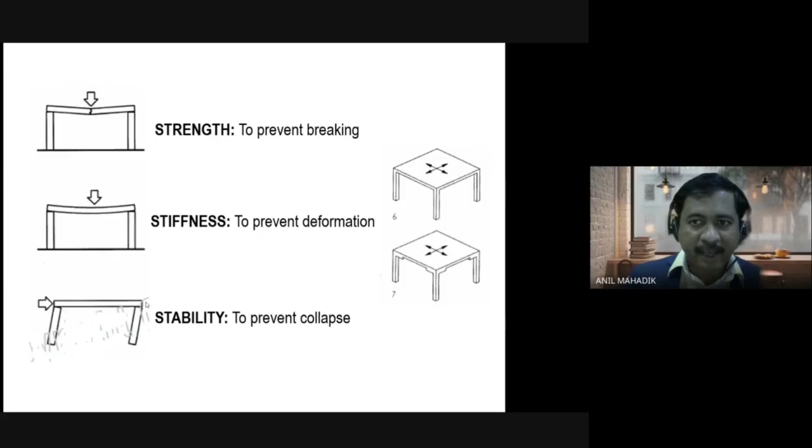To understand that, you should know strength, stiffness, and stability of the structures, and the IS codes used for this. You will learn that in our course. Everything you learn in the course.

Second part is analysis. You can do the analysis in softwares like ETABS or STAAD Pro, where we apply the loads on the structure model - gravity load, earthquake loads. Then we can get the forces from the analysis: bending moment, shear forces, earthquake forces, mode shapes, and so many things. These are required for design of the structures.

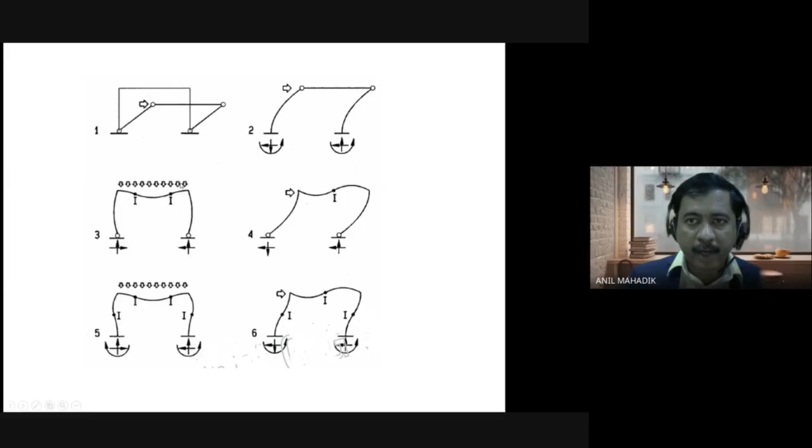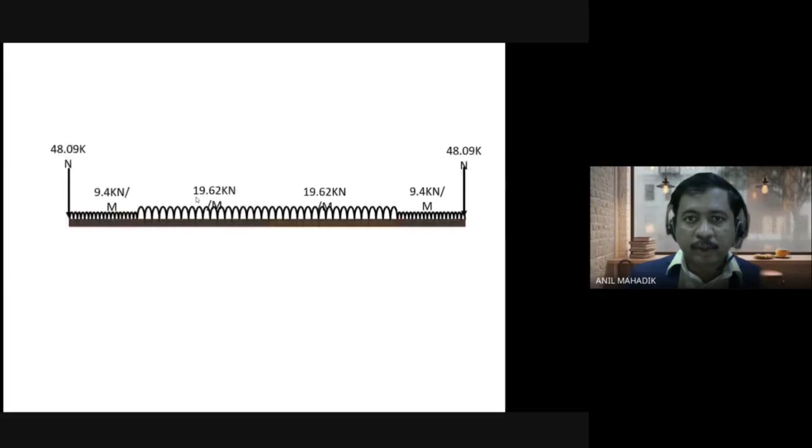To understand the analysis, you should know the deflected shape of the structure for vertical load and lateral loads, bending shapes, tension side, compression side, fixed support, pin support, and their behavior. You will learn that in the course for frames and multi-story buildings, so you can understand the bending moment and shear forces required for design of the members.

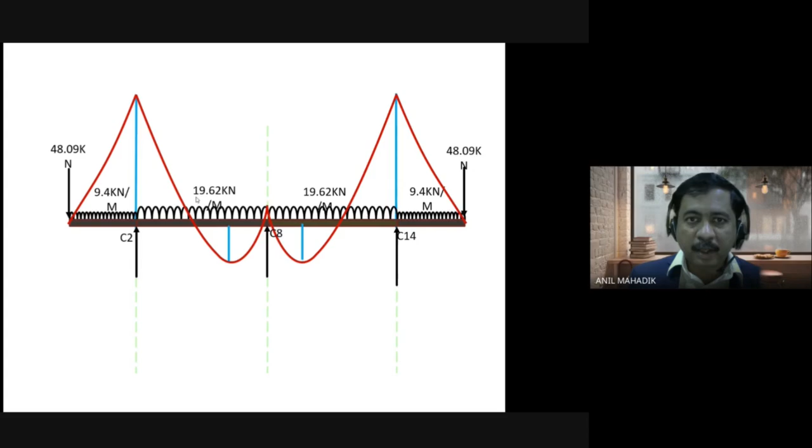Those who don't know the basic concepts regarding bending moment and shear forces - they are also covered in the course, in the concepts of structural engineering.

Then we can design the members. For example, in RCC buildings we design beam, column, slabs, and footings. In water tanks we design water tank walls, raft, slab, column, footings. In steel structures we design trusses, tension members, compression members, beams, purlins, channels, I sections, bolted connections, welded connections, mezzanine floors, gantry girders, and so many things in steel structures.

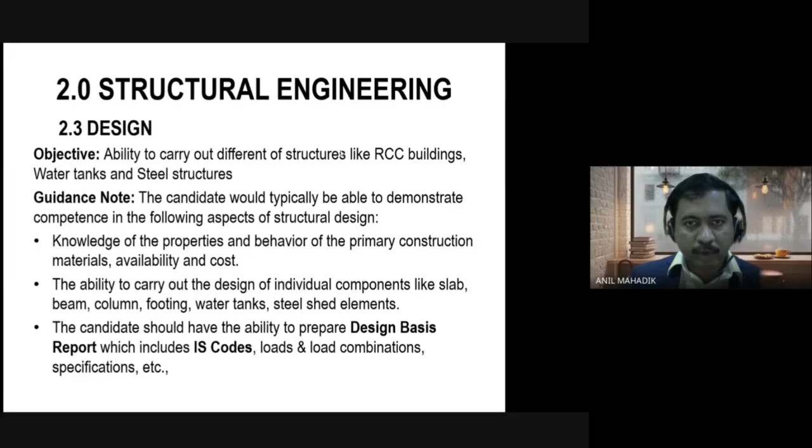So for different structures, different IS codes are used. You will learn this in the course. In the course, we consider 3 methods of design: design by manual calculations, design using Excel programs, and design using softwares like RCDC, STAAD Pro.

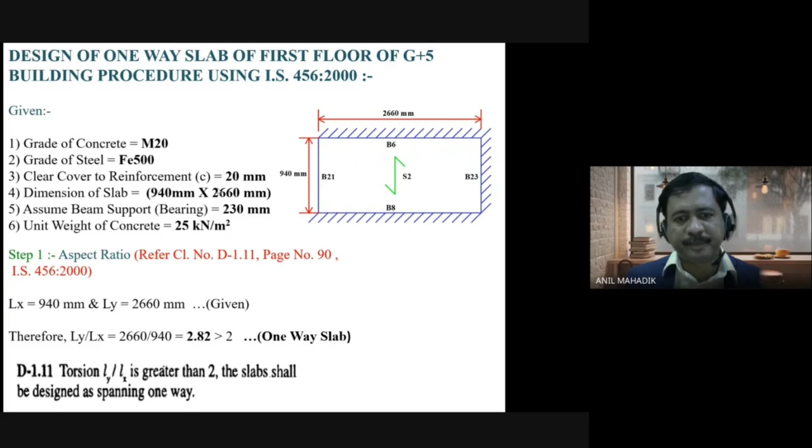Then design basis report - how to prepare the design basis report for any type of project, which is required in the industry. That training is covered.

Earthquake engineering part, along with the IS codes, is also covered - how to calculate earthquake loads, what is equivalent static analysis, response spectrum analysis, mode shapes, and high-rise building parameters used for high-rise building projects.

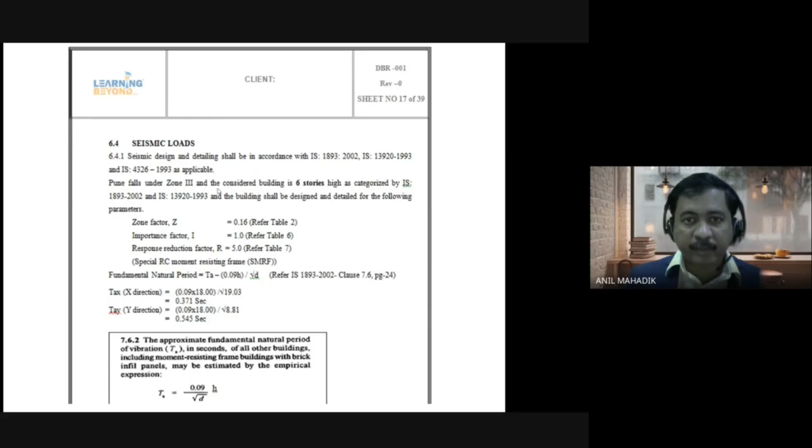Structural drawings - once you design the project, you can prepare the structural drawings in AutoCAD software. That part is also covered in the course, along with AutoCAD training and structural drawings: how to prepare foundation drawings, floor drawings, detailing of reinforcement as per IS codes, detailing of staircases, simply supported beams, continuous beams, cantilever beams, and many things required as per industry requirements.

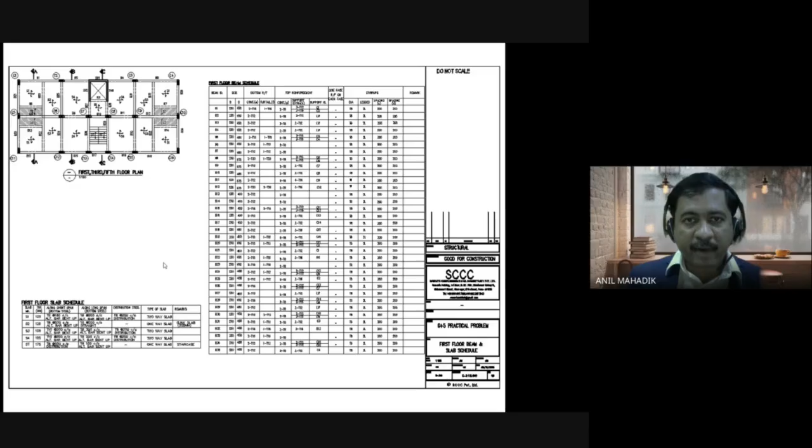So the major part of our career is till this point, whenever we work in any structural engineering company for any type of project. After that, we send the drawings to the site for construction, and the contractor's team will do the construction on site.

Now, once we have the knowledge of design of the structures, you can do the structural audit. So the basic part regarding structural audit is also covered in the course, with visual inspection, NDT test, core test, along with some case studies.

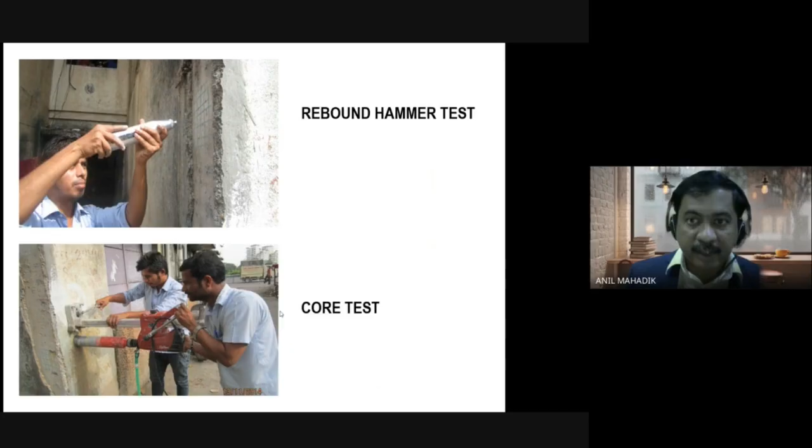And if you find any problems in the capacity of the members, you can do the repairs and retrofitting of the structure, like column jacketing and beam jacketing.

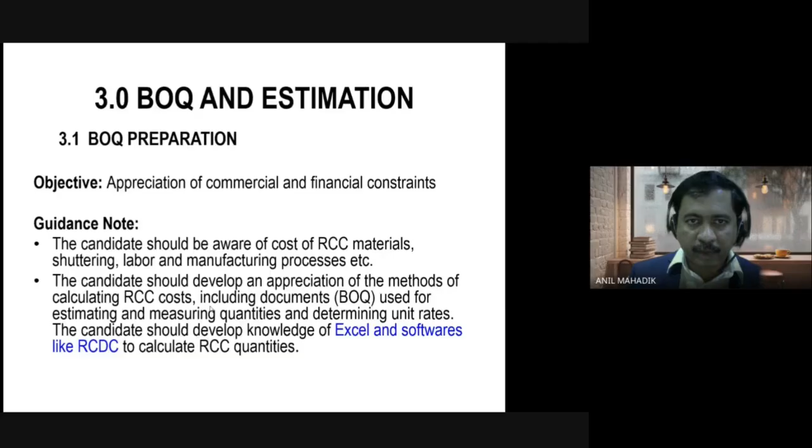BOQs are required for tender documentation. As a structural engineer, we can prepare the BOQ of the RCC part with quantity of concrete, steel reinforcement, PCC, excavation, formwork. You can do that in Excel or RCDC software. That is also covered in the course.

Then architecture drawing study and other discipline inputs are important aspects. We want inputs from different consultants for structural engineering analysis and design, so you should know how to read the architectural drawings, which we use for structural planning and analysis. That is covered in the course.

Then geotechnical report studies are covered in the course, which is used for foundation design, where we can learn how to decide the strata levels, hard strata levels, how to get the safe bearing capacity, water table data, bore log data from the geotechnical reports. Contour drawing study is also covered to understand the ground conditions and to see if there is any impact on the structural design due to the ground conditions.

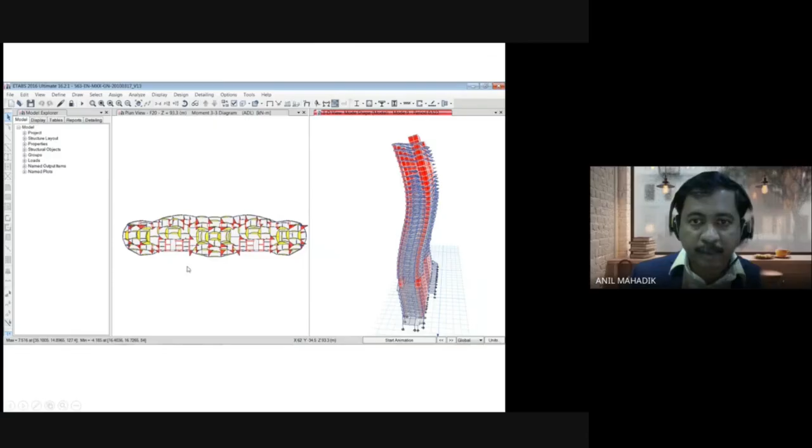The softwares we are covering: ETABS software, which is used for the analysis of high-rise buildings and RCC buildings. We are covering this training with gravity load, earthquake load, with practical projects. So these are some ETABS models, ETABS results, bending moments, mode shapes for the dynamic analysis.

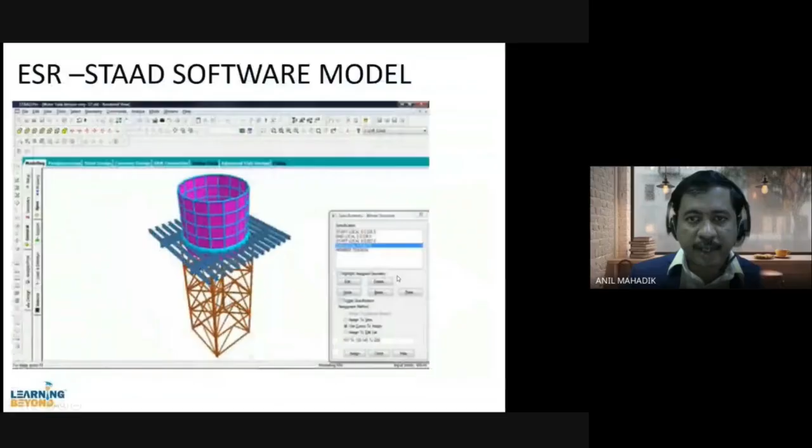STAAD Pro software is also covered in the training course, which is used for the analysis and design of steel structures, analysis of water tanks and buildings. This training is covered for industrial sheds, ESR water tanks, rectangular shapes, circular shapes.

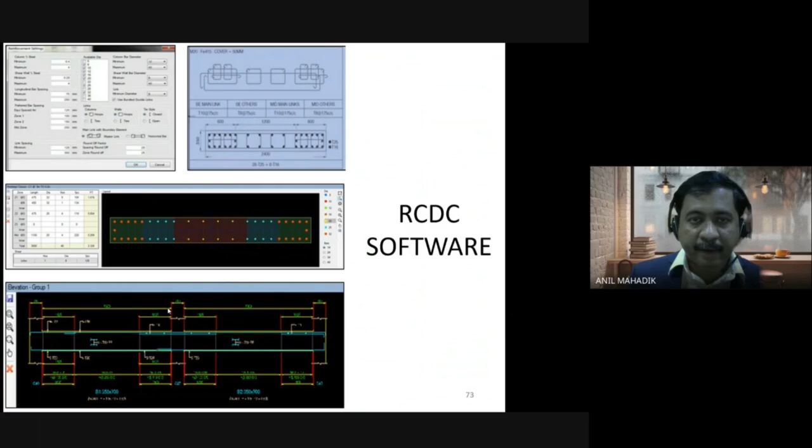RCDC software training is covered, which is used for design of beam, columns, slabs, and footing. It is also used for calculation reports. It can be used for drawing preparation, detailed drawings we can get from the RCDC software. We can transfer the ETABS results into RCDC and do the design and drawings. That is covered in the course. It can also give you BOQ for the RCC part.

AutoCAD software training is also covered in the course, where you can understand how to prepare the drawings from the basics. Once you know AutoCAD, you can do any type of drawings required for the projects, architecture or structure, whatever.

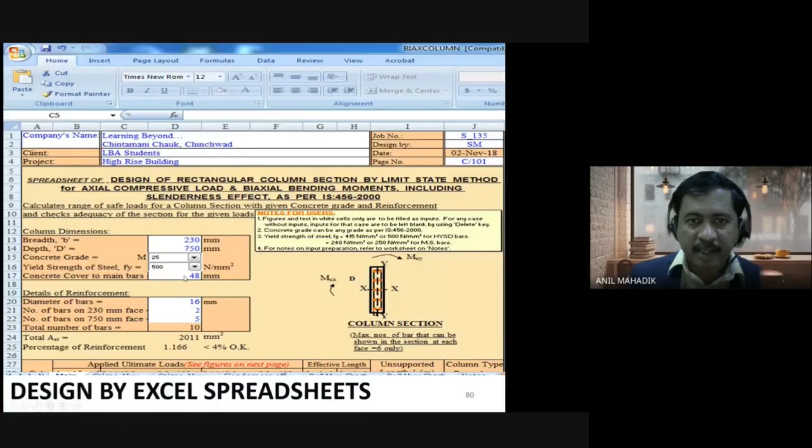Then Excel programs are covered in the course - how to use Excel programs for design of beam, columns, slabs, footings, steel structures, water tanks. You can see all these details in our website, I will give you the link at the end. Different Excel programs - column, beam, slab designs, how to use them for design - that is covered in the course.

Adobe Professional software is used for communication purposes, to give comments on the drawings, reports, photographs. And different practical projects are covered in the course.

For example, in high-rise buildings we are covering 5-story residential building, 20-story high-rise building, retaining walls, shear walls. Then in the industrial sector we are covering industrial sheds, analysis and design, gantry girders, trusses, canopies, mezzanine floors. In the water sector we are covering underground tanks, overhead tanks, ESR, clarifiers.

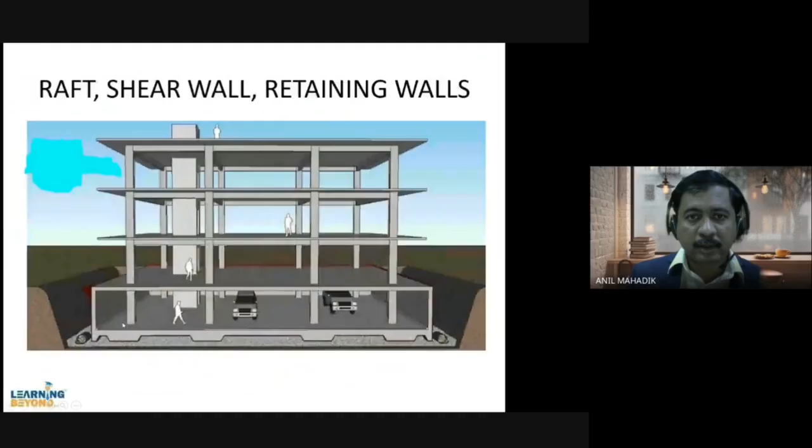Different practical projects: residential building, high-rise buildings, retaining walls, industrial sheds, using STAAD software, analysis design, wind loads, gravity loads, base plate design, gantry girders design, truss design, N-type truss.

Then portal beams, I-sections, channel sections, how to use them for design of industrial projects, mezzanine floor design, analysis and design with deck floors, concrete decks, and decking sheets. These are used in industrial projects for storage purpose or office buildings.

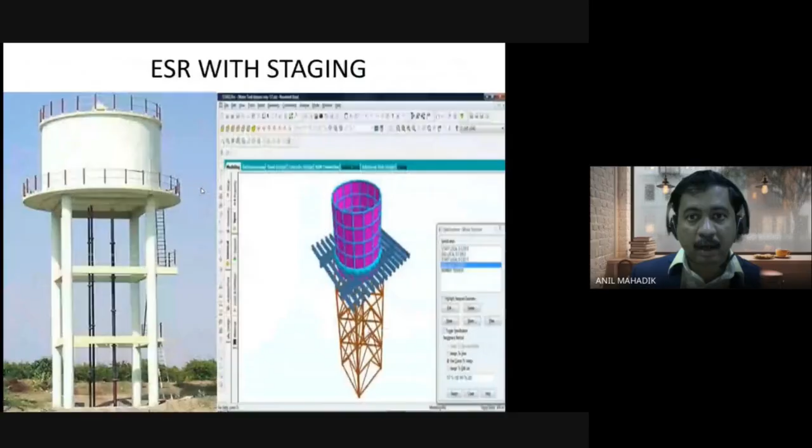Entrance canopies analysis and design, clarifiers used in sewage treatment plants - analysis, design, drawings, ESR - using STAAD software, rectangular tanks, underground tanks, circular tanks, and overhead tanks on the building.

So these are the projects which are covered in the training course. Once you have the knowledge of the analysis, design, drawing, practical projects, and softwares, you get a lot of experience, which is the requirement of the industry.

And you can learn everything, whatever I discussed, in our course, which is the Digital Structural Engineering Master's course. Each and every part is covered in recording format along with doubt sessions.

Now let me summarize what we are covering in this course. Once again, Digital Structural Engineering Master's course. We cover 7 softwares: AutoCAD, ETABS, SAFE, RCDC, Excel, STAAD Pro, Adobe Professional. We are covering a lot of manual calculations to understand the concepts of analysis and design, so that you can use these softwares effectively and work as an experienced person in the industry.

Then engineering, we are covering basics of structural engineering, reaction, bending moment, shear forces. Whatever you learn in the engineering college, we are covering. Then GA drawings, how to prepare that. Then the concepts of analysis, design drawings, structural audit and retrofitting, BOQ estimation, RCC part, architectural drawing study, geotechnical report study, contour drawing study, and 15 practical projects are covered in the course.

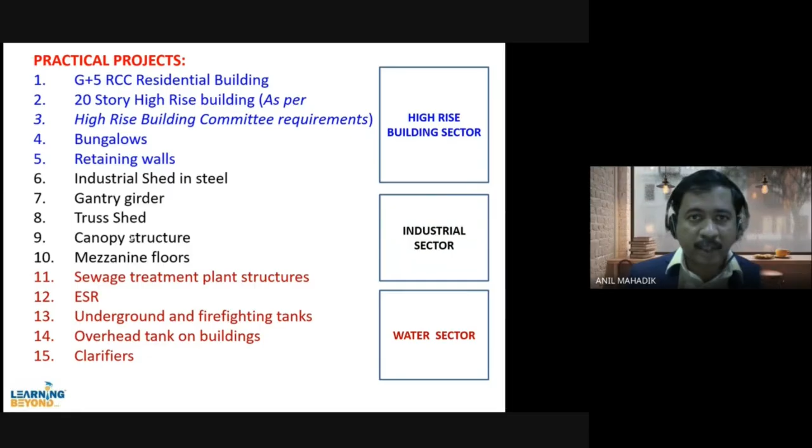See, such a huge knowledge, if you have on your CV, you can get jobs anywhere, all over the world. You can get jobs in MNCs, consultancy firms, building industries, industrial companies, or sewage treatment plant, effluent treatment plant related companies. Either you can go for jobs, or you can do the part-time work as a freelancer, outsourcing work.

Or if you are interested in business, you can start your business as a consultant or design build contractor. But you should have the knowledge, whatever I discussed with you. And you can apply that knowledge anywhere, in any industry. There are many companies who are hiring structural engineers in India and all over the world.

Who can join this course? Important aspects: civil engineers can join this course. Students, freshers, job seekers can join. Postgraduate engineers, M.E., M.Tech, PhD can join. Site engineers can join, structural engineers can join, professors can join, diploma students can join. It's for all civil engineers of any age.

Okay, so there are many students who have taken the training from us, and now they are doing well in the industry, in high-rise building sector, water sector, industrial sector. Many have started their business as a consultant. Many have joined companies in India, Middle East, Australia, and other countries also.

Okay, now regarding our course, please, important aspects. Digital Structural Engineering Master Course. It is also available on our website for detailed discussions. You can see start date is immediate, as it is a digital course in the form of recordings. All sessions are recorded, you can see that and start the course immediately.